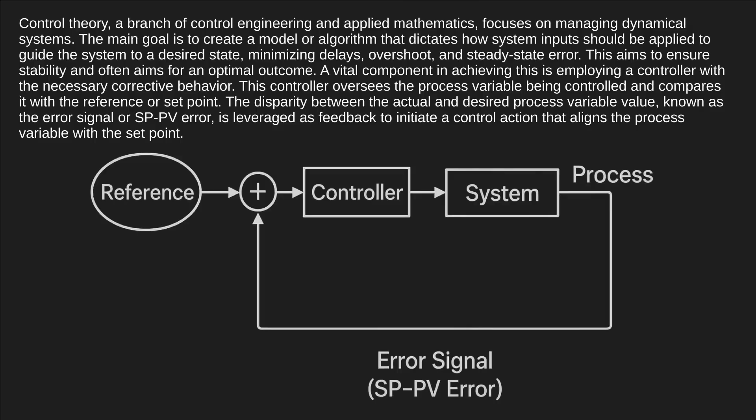Additionally, aspects like controllability and observability are also explored within this field. The applications of control theory are vast, impacting industries such as manufacturing, aviation, and communications, and catalyzing the emergence of fields like robotics. A common method employed in control theory is the block diagram representation, utilizing the transfer function, system function, or network function to mathematically model the relationship between input and output, structured on the system's differential equations.

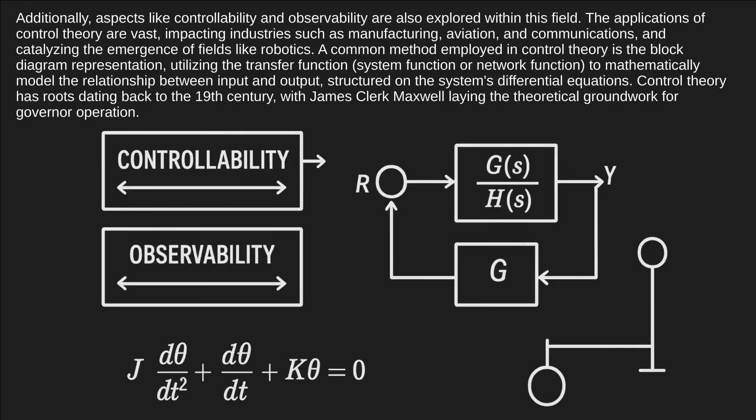Control theory has roots dating back to the 19th century, with James Clerk Maxwell laying the theoretical groundwork for governor operation. Further progress in the field was propelled by Edward Routh, Charles Sturm, Adolf Hurwitz, and Nicholas Minorsky, who collectively contributed to establishing control stability criteria and advancing PID control theory.

Beyond its traditional application in control systems engineering for robotics and industry, control theory finds utility in both natural and behavioral sciences. Serving as a fundamental theory for feedback systems, control theory is applicable wherever feedback mechanisms exist, extending its relevance to domains like economics, operations research, and the life sciences.

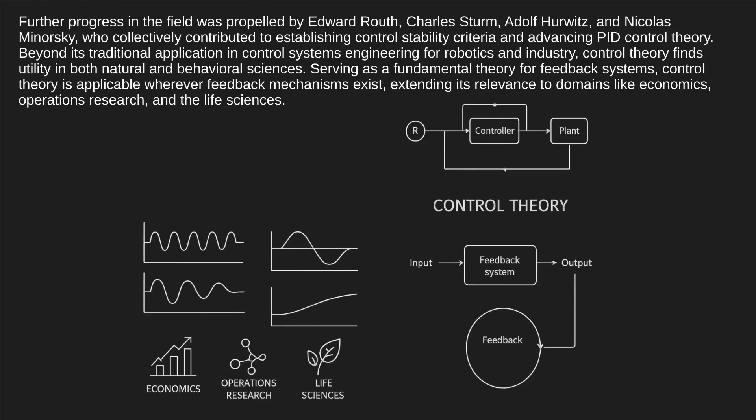Control systems have a rich history dating back centuries, with formal analysis gaining traction due to physicist James Clerk Maxwell's work on the centrifugal governor in 1868. Maxwell's study unveiled the concept of self-oscillation, demonstrating how delays in the system could trigger overcompensation and instability. This revelation spurred significant interest, leading Maxwell's classmate Edward John Routh to extend these findings to a broader range of linear systems. Concurrently, Adolf Hurwitz delved into system stability using differential equations in 1877, resulting in the now famous Routh-Hurwitz theorem.

Noteworthy advancements in dynamic control emerged in crewed flight, notably with the Wright brothers' successful test flights in 1903. Their ability to maintain control during sustained flights was crucial for aviation progress. Control theory gained further prominence during World War II, with Irmgard Flügge-Lotz pioneering the theory of discontinuous automatic control systems, particularly in developing automatic flight control equipment for aircraft using the bang-bang principle. Beyond aviation, discontinuous controls found applications in fire control systems, guidance systems, and electronics.

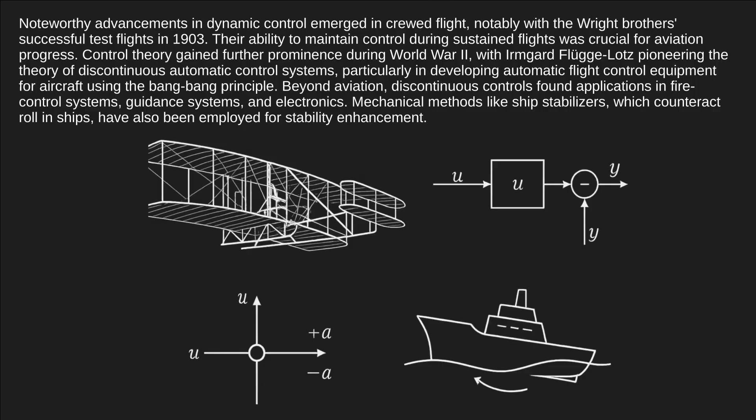Mechanical methods like ship stabilizers, which counteract roll in ships, have also been employed for stability enhancement. Modern ship stabilizers are gyroscopically controlled active fins adept at adjusting their angle of attack to counter external forces. In the space race, precise spacecraft control was paramount, underscoring the importance of control theory in various fields, including economics and artificial intelligence. In economics, accurate trading models that mirror market dynamics enable better market control and profitability extraction.

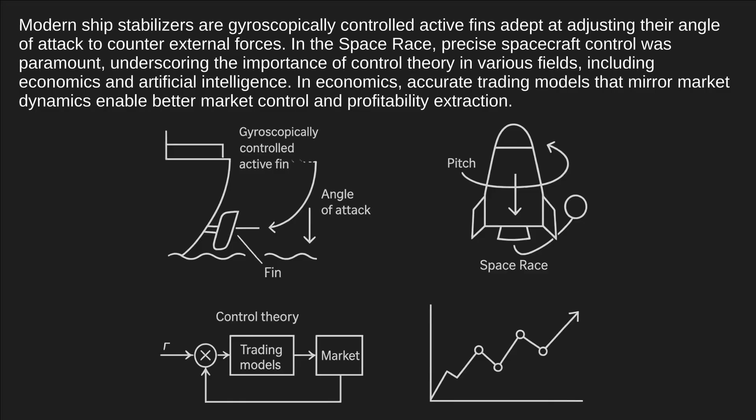Two fundamental types of control loops are present: open-loop control, feed-forward, and closed-loop control, feedback. In open-loop control, the controller's action operates independently of the process output, or controlled process variable. An illustration of this is a central heating boiler, regulated solely by a timer, providing heat for a fixed duration, regardless of the building's temperature. Although the control action involves switching the boiler on or off, the controlled variable ideally should be the building temperature, which is not the case in open-loop control.

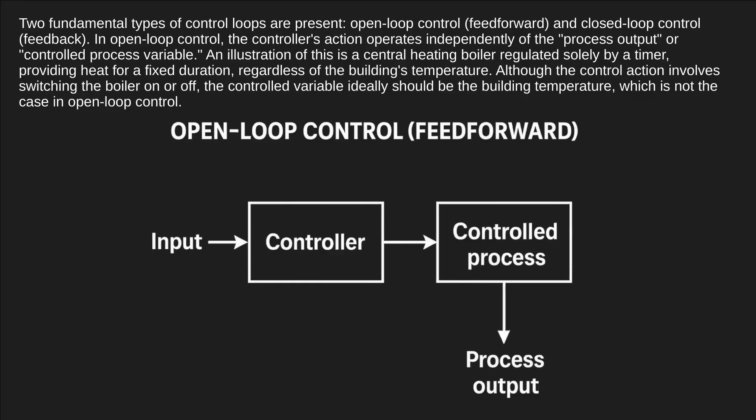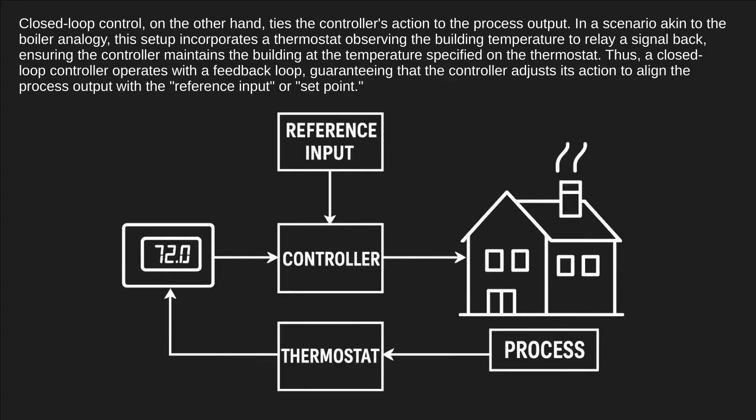Closed-loop control, on the other hand, ties the controller's action to the process output. In a scenario akin to the boiler analogy, this setup incorporates a thermostat observing the building temperature to relay a signal back, ensuring the controller maintains the building at the temperature specified on the thermostat. Thus, a closed-loop controller operates with a feedback loop, guaranteeing that the controller adjusts its action to align the process output with the reference input, or set point. Consequently, closed-loop controllers are also known as feedback controllers.

According to the British Standards Institution, a closed-loop control system is defined as a control system equipped with monitoring feedback, where the deviation signal resulting from this feedback is utilized to regulate the final control element's action to minimize the deviation to zero. And similarly, a feedback control system is described as a system that strives to uphold a defined relationship between one system variable and another by comparing functions of these variables and utilizing the disparity for control purposes.

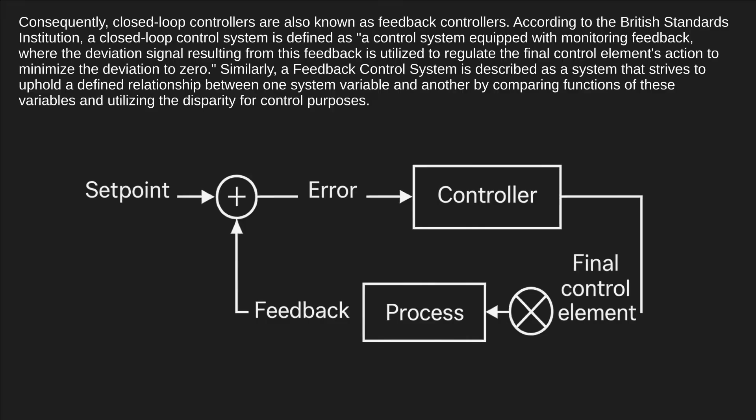A closed-loop controller, also known as a feedback controller, utilizes feedback in its control loop, unlike an open-loop controller. In a closed-loop system, feedback is employed to regulate the states or outputs of a dynamical system.

This feedback loop involves the process inputs affecting the process outputs, which are then measured by sensors, processed by the controller, and fed back as an input to the process, effectively closing the loop. In linear feedback systems, a control loop consisting of sensors, control algorithms, and actuators is structured to maintain a variable at a specific set point, SP.

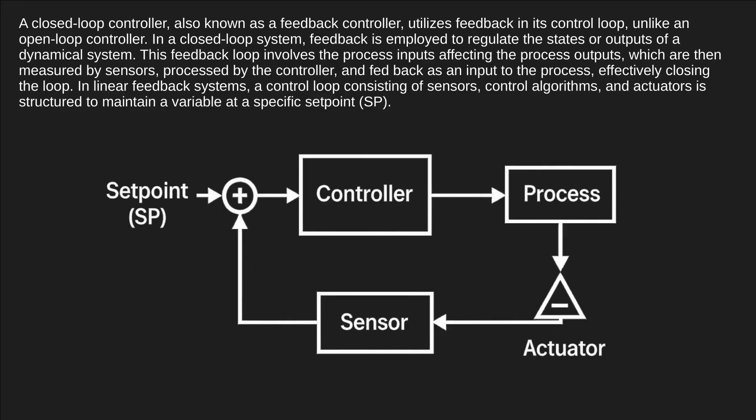An illustration of this concept can be seen in the cruise control of a vehicle, where external factors like hills can impact speed, and the driver can adjust the desired set speed accordingly. Through the PID algorithm within the controller, the actual speed is adjusted to the desired speed efficiently, minimizing delays or overshoots by regulating the engine power output.

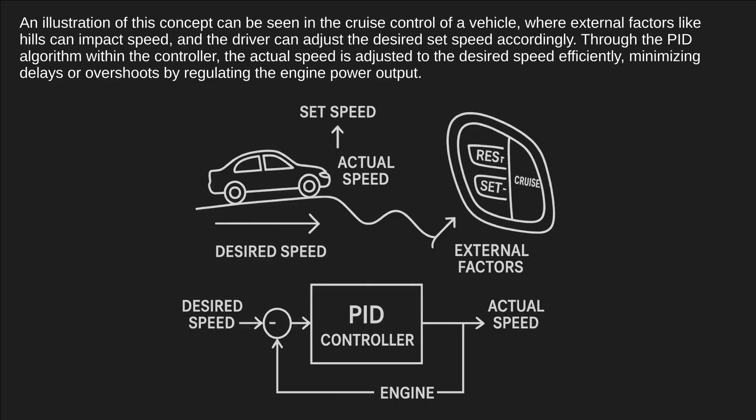Closed-loop controllers offer several advantages over open-loop controllers, including disturbance rejection, assured performance even in the presence of model uncertainties, stabilization of unstable processes, decreased sensitivity to parameter variations, improved reference tracking, and better rectification of random fluctuations. In some systems, both closed-loop and open-loop controls are employed simultaneously, with the open-loop control termed as feed-forward, enhancing reference tracking performance. One of the common architectures for a closed-loop controller is the PID controller.

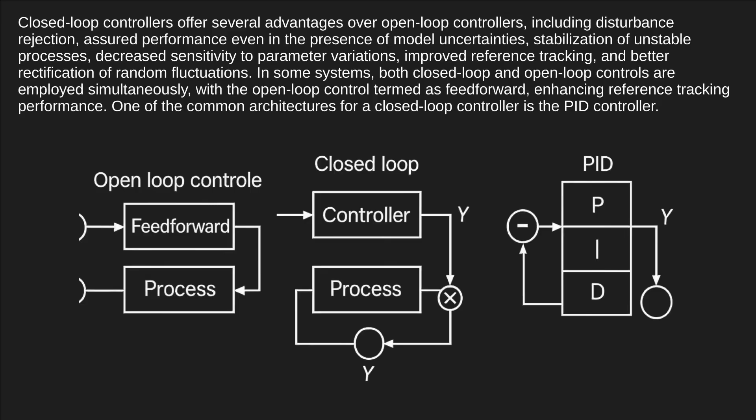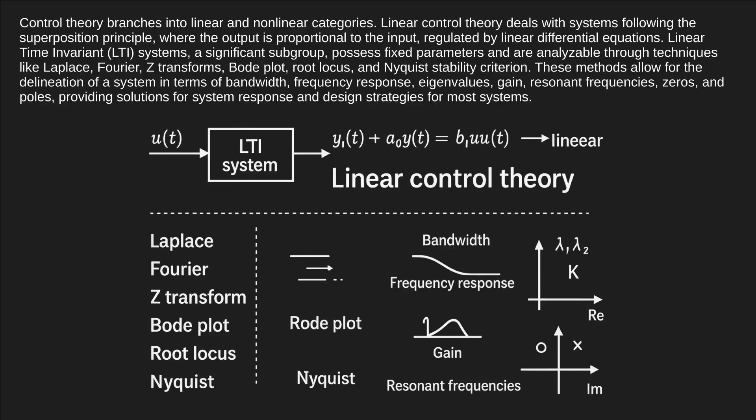Control theory branches into linear and nonlinear categories. Linear control theory deals with systems following the superposition principle, where the output is proportional to the input, regulated by linear differential equations. Linear time invariant, LTI systems, a significant subgroup, possess fixed parameters and are analyzable through techniques like Laplace, Fourier, Z-transforms, Bode plot, root locus, and Nyquist stability criterion. These methods allow for the delineation of a system in terms of bandwidth, frequency response, eigenvalues, gain, resonant frequencies, zeros, and poles, providing solutions for system response and design strategies for most systems.

On the other hand, nonlinear control theory pertains to systems deviating from the superposition principle, capturing a broader range of real-world systems due to their inherent nonlinear behavior governed by nonlinear differential equations. Mathematical tools for nonlinear systems are more intricate and less versatile, restricted to specific system categories. Techniques like limit cycle theory, Poincare maps, Lyapunov stability theorem, and describing functions offer insight into nonlinear system behavior. When analyzing nonlinear systems, numerical methods are commonly employed, such as simulation in a computational environment, to approximate system dynamics. Linearization through perturbation theory enables the application of linear techniques for solutions near stable points in nonlinear systems.

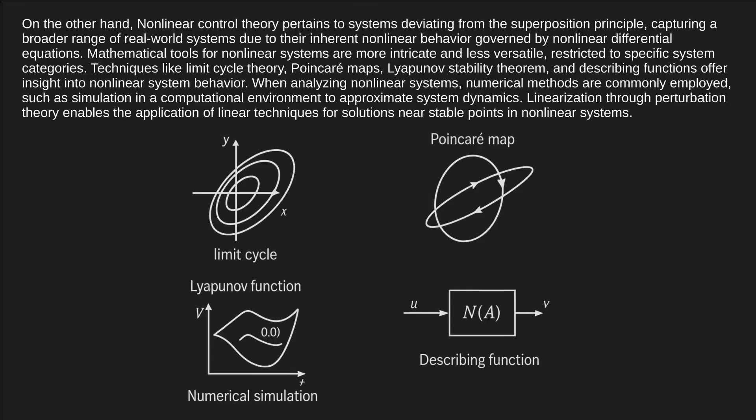Mathematical techniques for analyzing and designing control systems are divided into two main categories: frequency domain and time domain state space representation. In the frequency domain, state variables and system functions are expressed as functions of frequency through tools like the Fourier transform, Laplace transform, or Z-transform. This transformation simplifies the mathematics involved, converting differential equations into easier-to-solve algebraic equations in the frequency domain. However, this method is limited to linear systems.

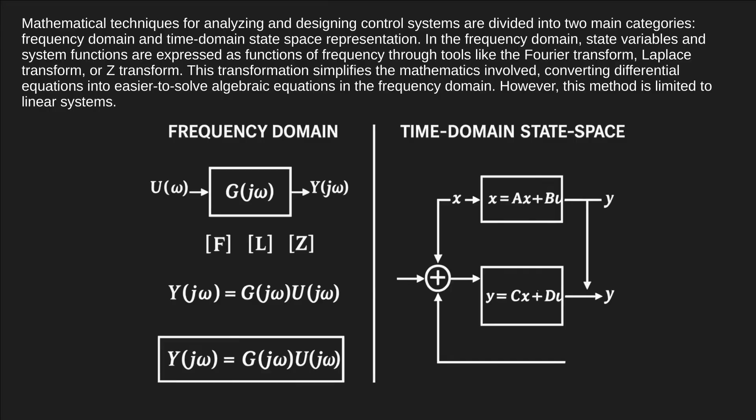On the other hand, time domain state space representation portrays the state variables in terms of time, describing the system with one or more differential equations. This approach is commonly used for analyzing real-world nonlinear systems which cannot be handled using frequency domain techniques due to their linearity constraints. While solving time domain models can be more complex, the advent of modern computer simulation techniques has made their analysis more manageable through tools like simulation languages. Modern control theory favors the time domain state space representation over the classical frequency domain analysis, using a mathematical model that relates input, output, and state variables through first-order differential equations.

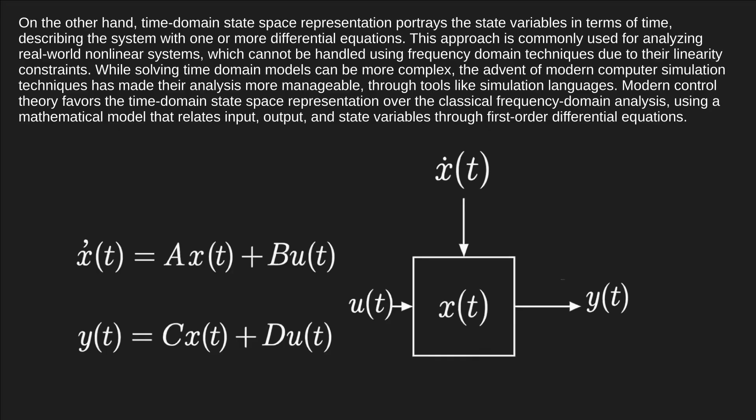By encapsulating the system's dynamics in a set of equations, the state space representation treats all variables as vectors and organizes differential and algebraic equations in matrix form, a feasible task only for linear dynamical systems. This method enables a concise and effective way to model and analyze systems with multiple inputs and outputs, offering a more streamlined alternative to encoding system information through Laplace transforms as required in the frequency domain technique. Unlike frequency domain analysis, the state space representation can handle nonlinear components and non-zero initial conditions, providing a flexible framework for system analysis and design where the state variables define the system state in a multidimensional space.

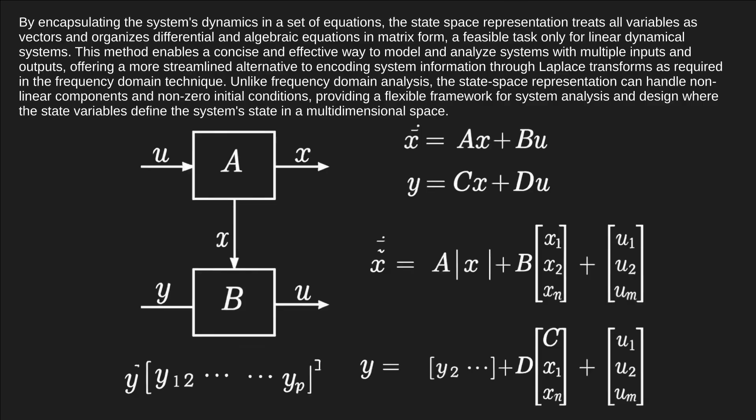Control systems can be categorized based on the number of inputs and outputs they encompass. Single input, single output SISO systems are the most straightforward, with one control signal regulating one output. Examples include a cruise control mechanism and audio systems, where the input audio signal influences the sound waves emitted from the speaker. On the other hand, multiple input, multiple output MIMO systems are more intricate, as seen in modern large telescopes like the Keck and MMT.

These telescopes have mirrors with numerous segments controlled by actuators. A MIMO control system adjusts the mirror's shape using data from multiple sensors to counterbalance changes caused by factors like thermal expansion, stresses from rotation, and atmospheric turbulence affecting the wavefront. Complex systems like nuclear reactors and human cells are often simulated as large MIMO control systems on computers for analysis purposes.

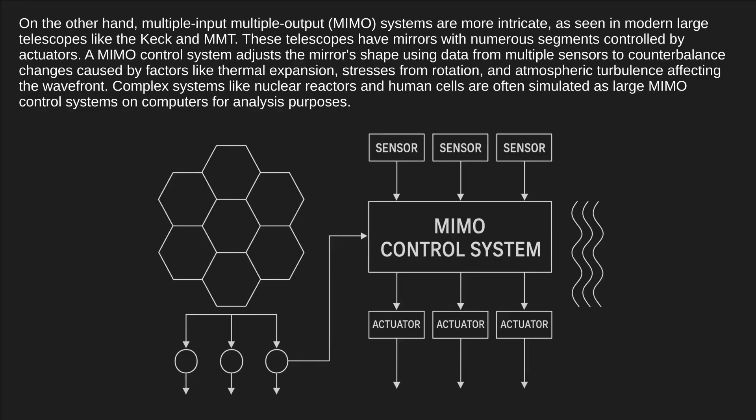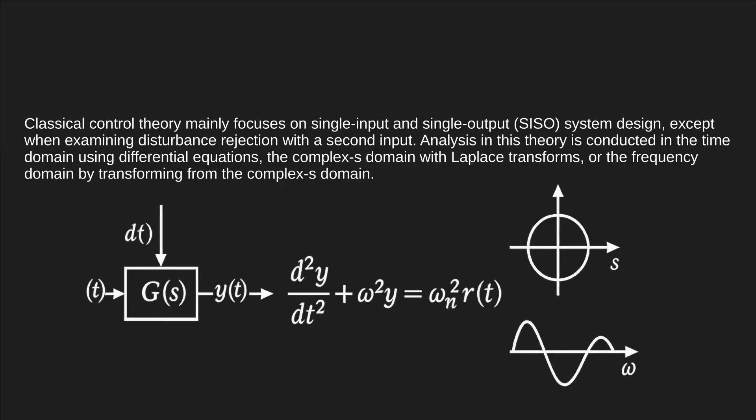Classical control theory mainly focuses on single input and single output, SISO, system design, except when examining disturbance rejection with a second input. Analysis in this theory is conducted in the time domain using differential equations, the complex S domain with Laplace transforms, or the frequency domain by transforming from the complex S domain.

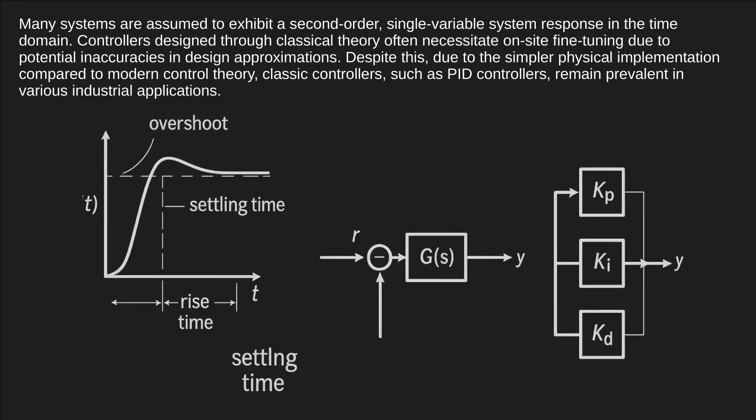Many systems are assumed to exhibit a second-order single-variable system response in the time domain. Controllers designed through classical theory often necessitate on-site fine-tuning due to potential inaccuracies in design approximations. Despite this, due to the simpler physical implementation compared to modern control theory, classic controllers, such as PID controllers, remain prevalent in various industrial applications. These controllers may occasionally incorporate lead or lag filters.

The primary objective remains meeting predefined requirements in the time domain, focusing on the step response, or sometimes in the frequency domain, examining the open-loop response. Specifications often include characteristics like percent overshoot, settling time for step response, and gain and phase margin alongside bandwidth for open-loop response.

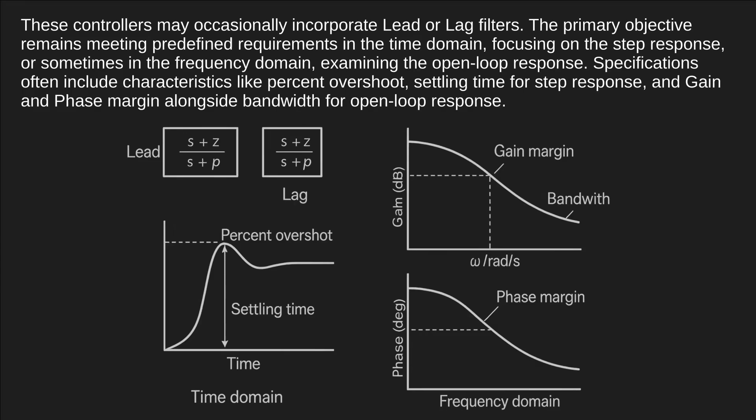In contrast, modern control theory adopts a state space approach to tackle multiple input and multiple output MIMO systems, surmounting the limitations of classical control theory in more advanced scenarios, such as fighter aircraft control. However, the trade-off involves the inability to conduct frequency domain analysis.

In modern design practices, systems are ideally modeled as a series of decoupled first-order differential equations utilizing state variables. This methodology accommodates nonlinear, multivariable, adaptive, and robust control theories. The relatively recent emergence of modern control theory leaves many unexplored areas, with prominent scholars like Rudolf E. Kálmán and Aleksandr Lyapunov shaping its development.

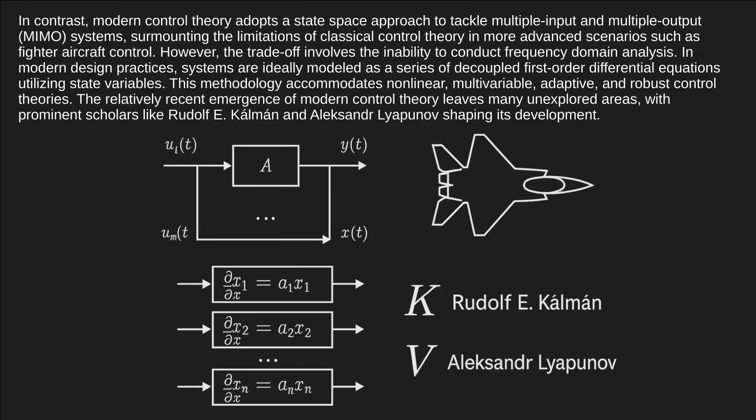The stability of a general dynamical system with no input can be analyzed using Lyapunov stability criteria. For systems with input, stability is determined by input-to-state stability, ISS, a combination of Lyapunov stability and a concept akin to bounded input, bounded output, BIBO, stability for linear systems, ensuring the output remains bounded for any bounded input.

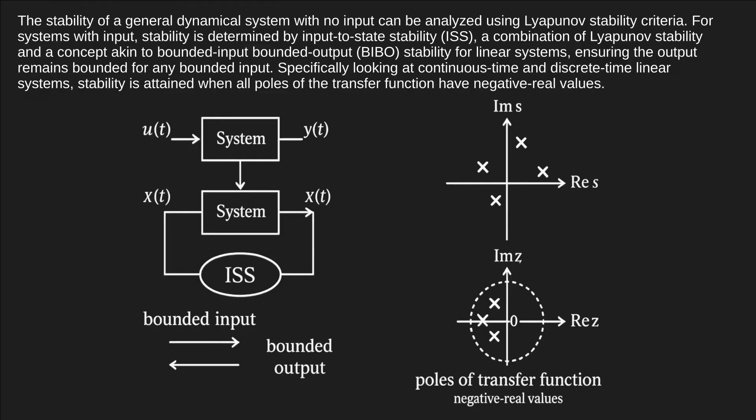Specifically looking at continuous time and discrete time linear systems, stability is attained when all poles of the transfer function have negative real values. In continuous time, this means the complex poles must reside in the open left half of the complex plane when using Laplace transforms. Conversely, in discrete time, the poles should be inside the unit circle when employing the Z-transform.

Asymptotic stability is achieved when these conditions are met, resulting in system variables consistently decreasing from their initial state without persistent oscillations. Permanent oscillations manifest when poles have zero real parts (continuous time) or a modulus of one (discrete time).

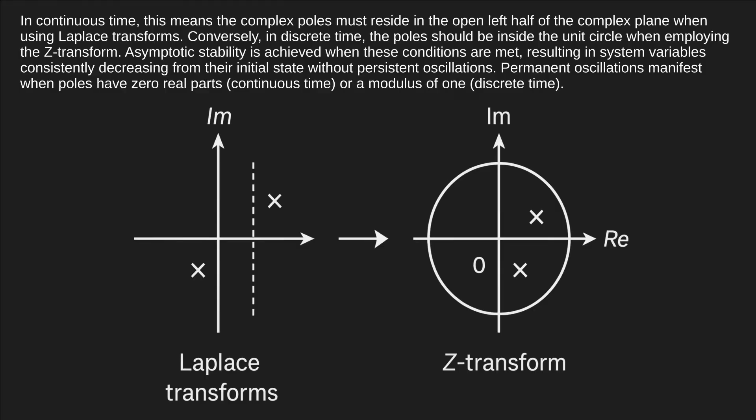Marginally stable systems exhibit responses that neither decay nor grow over time, with no oscillations, characterized by non-repeated poles at the origin of the complex plane, real and complex components being zero. Oscillations arise when poles with zero real parts possess non-zero imaginary parts. Analysis tools like root locus, Bode plots, or Nyquist plots are commonly used to assess system poles.

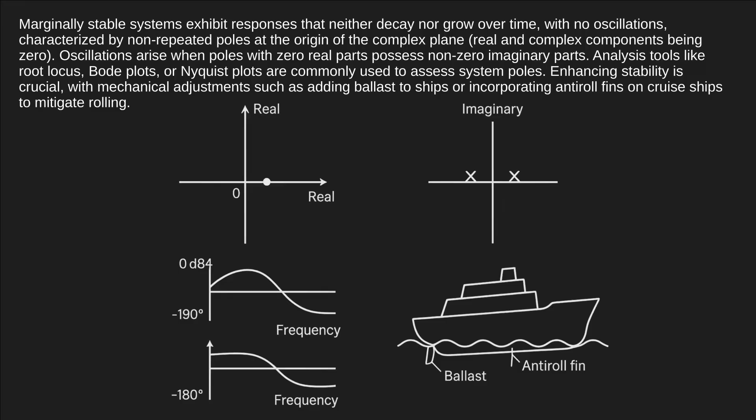Enhancing stability is crucial, with mechanical adjustments such as adding ballast to ships or incorporating anti-roll fins on cruise ships to mitigate rolling. Controllability and observability play crucial roles in the preliminary analysis of a system to determine the most suitable control approach and its feasibility in stabilizing the system.

Controllability concerns the system's ability to be driven to a specific state using an appropriate control input, implying that if a state is uncontrollable, no input will influence it. However, if an uncontrollable state features stable dynamics, it can be termed as stabilizable. On the other hand, observability deals with the system's state being deducible through output observations.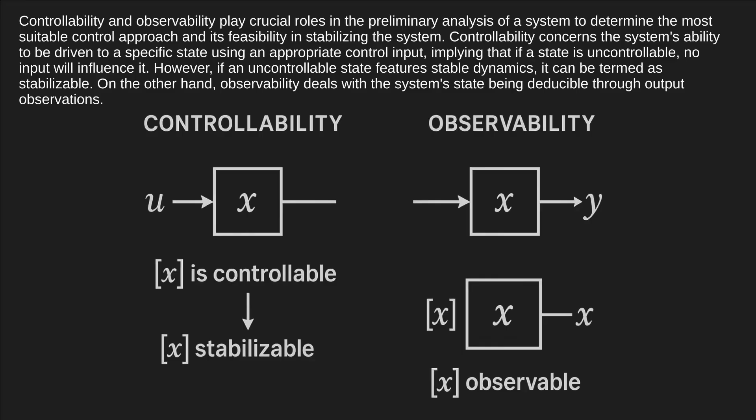An unobservable state makes it impossible for the controller to understand its behavior and consequently stabilize the system. Despite being unobservable, a state may still be detectable. Geometrically, for a system's variables, all undesirable states must be both controllable and observable to ensure favorable performance in the closed-loop system. Failure to meet this criterion means that any uncontrollable and unobservable eigenvalues will persist in the closed-loop system,

potentially rendering it unstable. Unobservable poles are absent in the transfer function form of a state space model, which is why it is sometimes preferred in dynamic systems analysis. Remedies for issues in uncontrollable or unobservable systems involve integrating actuators and sensors.

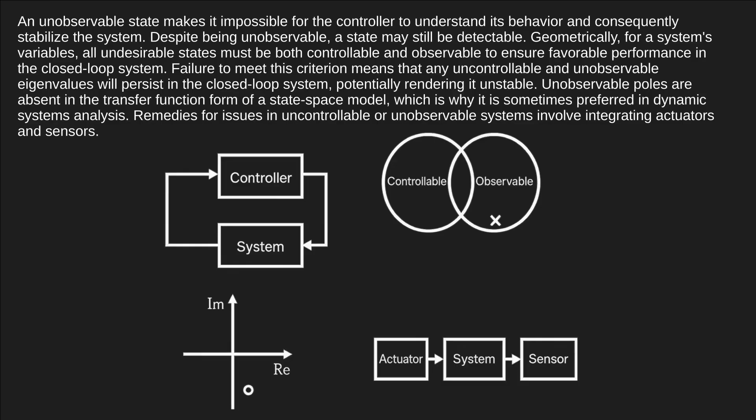Various control strategies have emerged, ranging from general ones such as PID controllers to specialized approaches for specific system classes like robotics or aircraft cruise control. Stability is a core requirement in control, where the controller must maintain closed-loop system stability regardless of open-loop conditions. Ill-advised controller selection can exacerbate open-loop stability concerns and should be avoided.

Desired closed-loop dynamics, disturbance rejection, and performance metrics regarding time response and frequency domains are typical control specifications. These specifications govern factors like rise time, peak overshoot, settling time, and robustness, among others. Contemporary evaluation methods often utilize integrated tracking error variants for performance assessment.

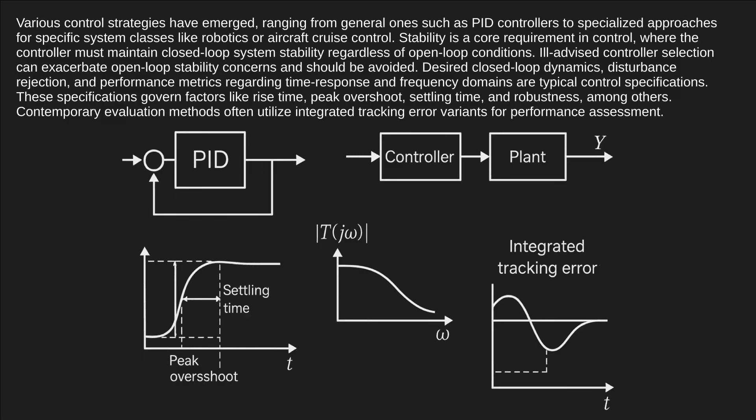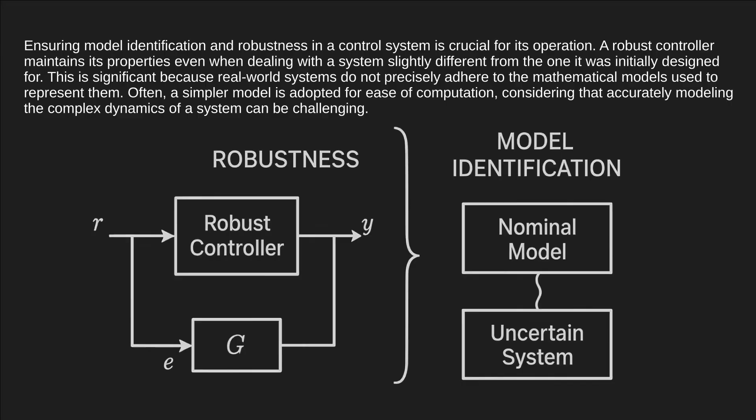Ensuring model identification and robustness in a control system is crucial for its operation. A robust controller maintains its properties even when dealing with a system slightly different from the one it was initially designed for. This is significant because real-world systems do not precisely adhere to the mathematical models used to represent them. Often, a simpler model is adopted for ease of computation, considering that accurately modeling the complex dynamics of a system can be challenging.

System identification plays a key role in determining the equations governing a model's behavior. This process involves deriving an approximation of the mathematical model, typically in the form of a transfer function or matrix, based on a series of measurements. However, this approach may overlook unobservable dynamics. Alternatively, models can be constructed based on known physical equations, such as in the case of a mass spring damper system.

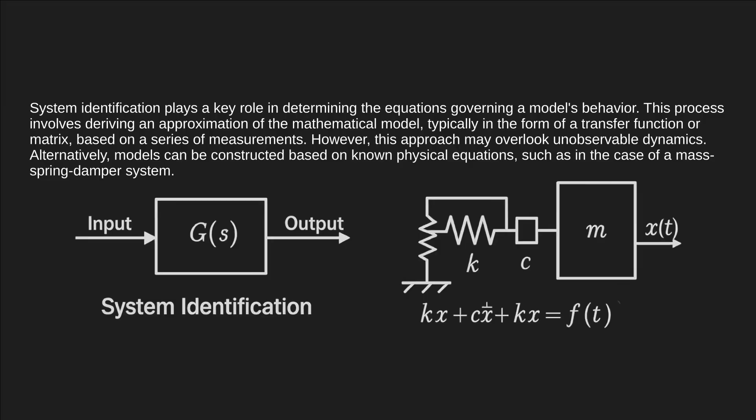Even when a complete model is utilized to design the controller, the nominal parameters within the equations are not precisely known. Control systems must adapt to variations in parameter values when connected to physical systems. Advanced control techniques incorporate online identification processes to calculate model parameters while the controller is operational. This real-time adjustment ensures proper system performance, especially when facing significant parameter changes, like a sudden release of weight by a robotic arm.

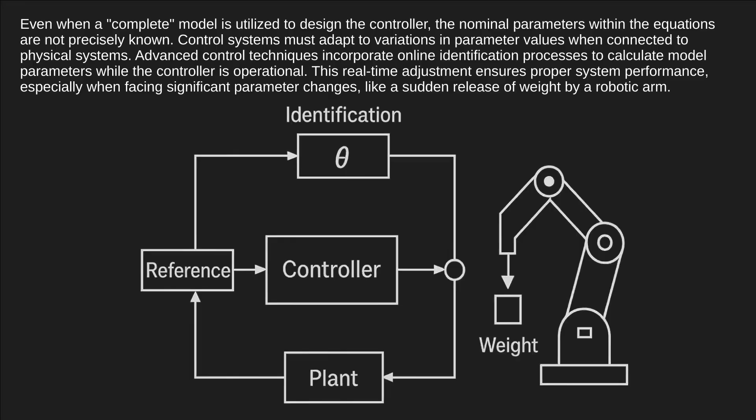In analyzing the robustness of a single input, single output (SISO) control system, frequency domain techniques are employed, with considerations given to the system's transfer function using tools like Nyquist and Bode diagrams. For more complex systems like multi-input, multi-output (MIMO), specific control techniques must be tailored to meet the desired robustness qualities. Understanding gain and phase margin as well as amplitude margin is essential in evaluating system robustness.

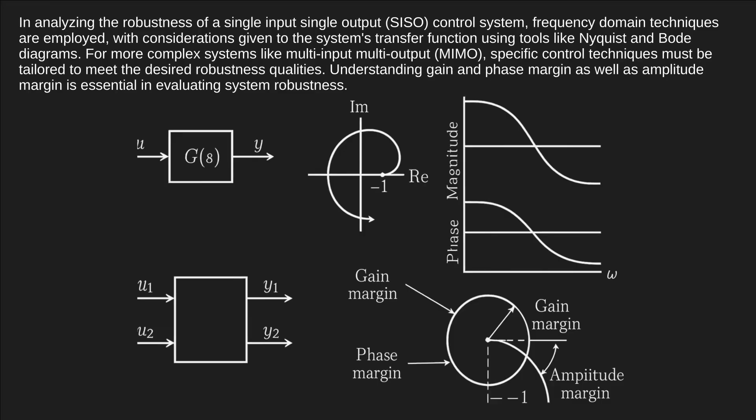Addressing input and state constraints is a critical aspect of ensuring system robustness. Controllers must operate effectively within signal limits to avoid issues like exceeding physical system constraints that could lead to undesired behavior or damage. Techniques like model predictive control and anti-windup systems are utilized to mitigate these challenges, with the latter preventing control signals from surpassing predefined thresholds, thereby maintaining system stability and performance.

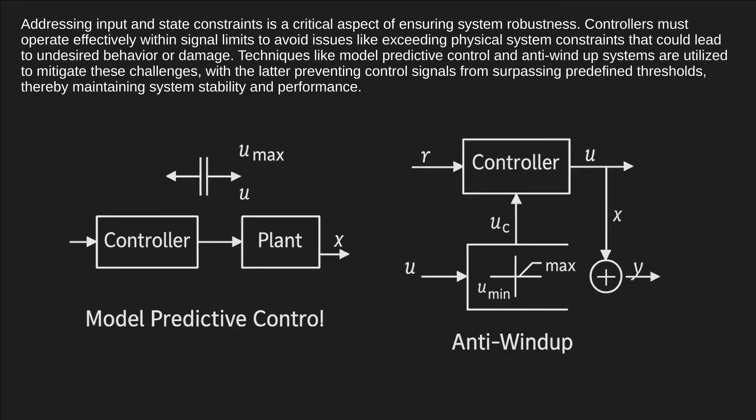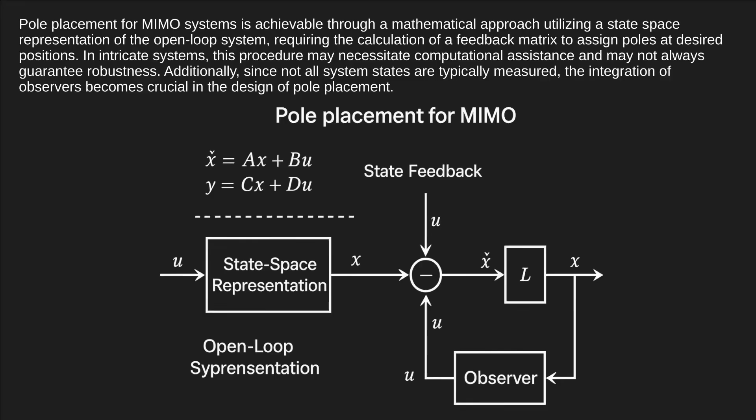In the realm of nonlinear control, industries such as robotics and aerospace often face significant nonlinear dynamics challenges. While linear techniques can sometimes be applied after linearizing these systems, developing theories from the ground up may be essential for effective control in many scenarios. Techniques such as feedback linearization, backstepping, sliding mode control, and trajectory linearization control rely on results rooted in Lyapunov's theory to tackle the complexities of nonlinear control. Differential geometry plays a crucial role in extending established linear control concepts to nonlinear systems, highlighting the intricacies that make nonlinear control a more intricate problem.

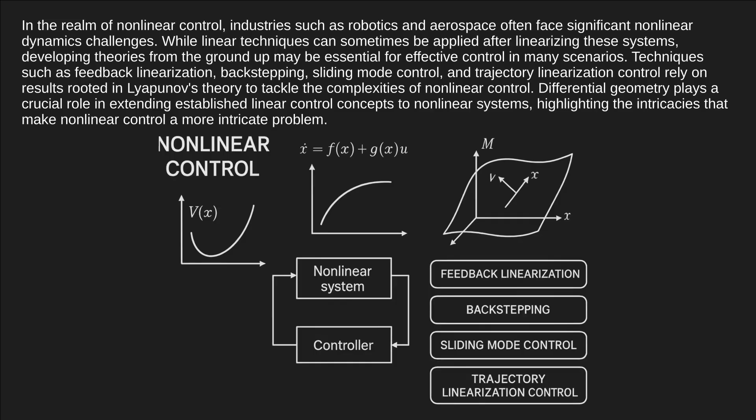Control theory's applications extend to understanding the neural mechanisms that govern cognitive states. Decentralized control systems come into play when a system is overseen by multiple controllers. Decentralization offers advantages such as enabling control systems to function over vast geographical regions. Agents within decentralized control systems can communicate through channels and coordinate their activities effectively. Stochastic control involves state variable evolution influenced by random external shocks, whereas deterministic control problems do not involve such random external interferences.

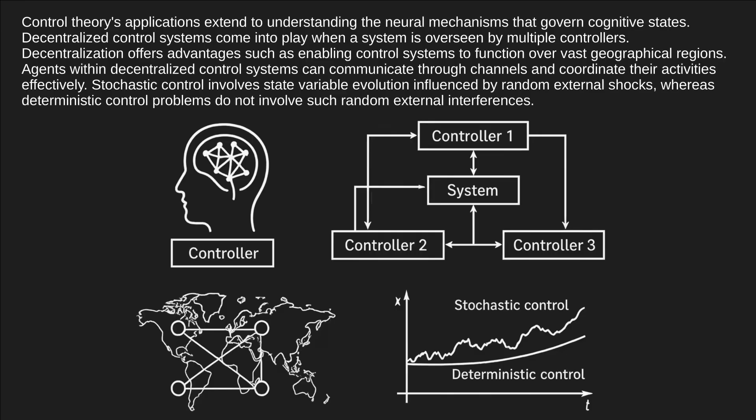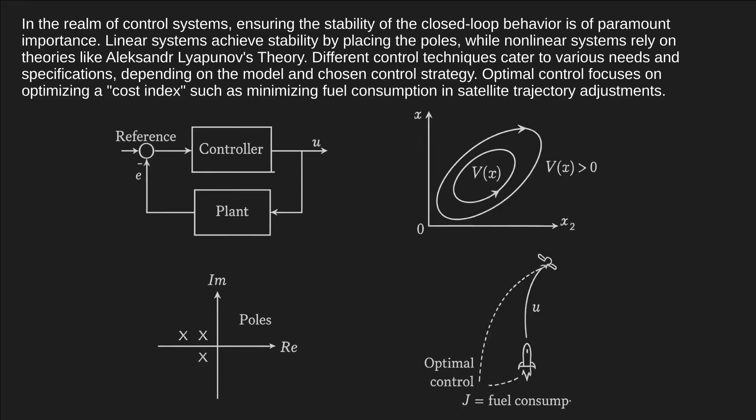In the realm of control systems, ensuring the stability of the closed-loop behavior is of paramount importance. Linear systems achieve stability by placing the poles, while nonlinear systems rely on theories like Aleksandr Lyapunov's theory. Different control techniques cater to various needs and specifications depending on the model and chosen control strategy. Optimal control focuses on optimizing a cost index, such as minimizing fuel consumption in satellite trajectory adjustments. The widely utilized methods for optimal control design are model predictive control, MPC, and linear quadratic Gaussian control, LQG, which guarantee closed-loop stability. MPC stands out for its ability to consider constraints on system signals explicitly, making it crucial for industrial processes.

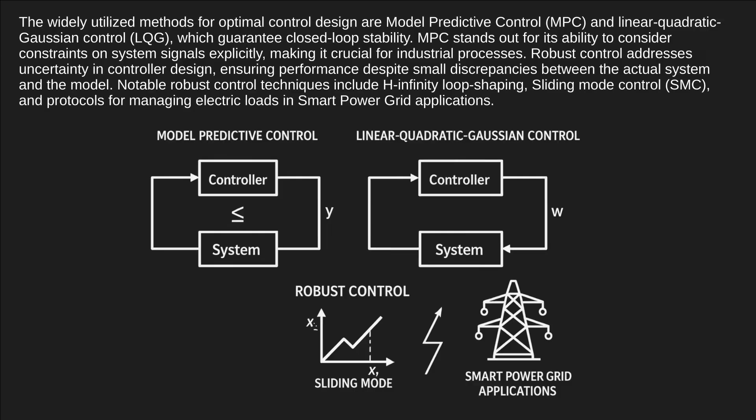Robust control addresses uncertainty in controller design, ensuring performance despite small discrepancies between the actual system and the model. Notable robust control techniques include H-infinity loop shaping, sliding mode control, SMC, and protocols for managing electric loads in smart power grid applications. Stochastic control tackles design under model uncertainty, accounting for random noise and disturbances.

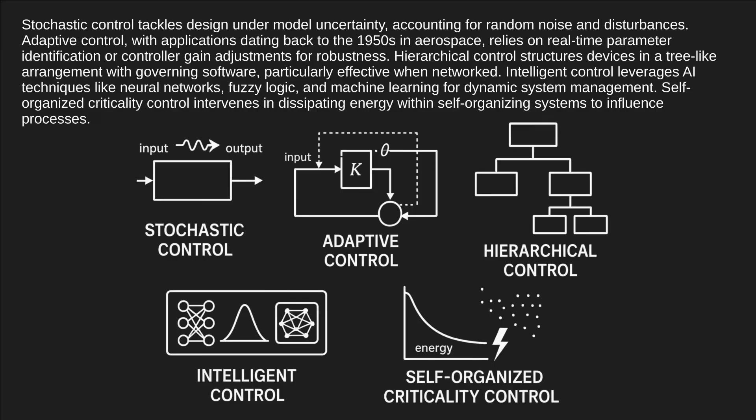Adaptive control, with applications dating back to the 1950s in aerospace, relies on real-time parameter identification or controller gain adjustments for robustness. Hierarchical control structures devices in a tree-like arrangement with governing software, particularly effective when networked. Intelligent control leverages AI techniques like neural networks, fuzzy logic, and machine learning for dynamic system management. Self-organized criticality control intervenes in dissipating energy within self-organizing systems to influence processes.